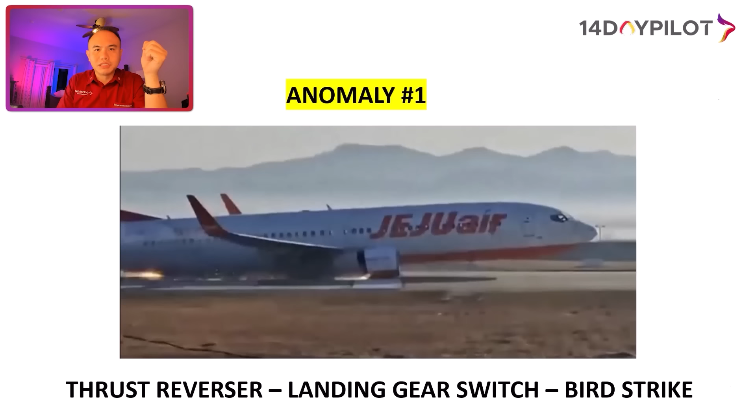The thrust reverser, landing gear switch, and bird strike. Based on this footage, I did a screenshot, and if you can see here, it's very clear that engine number 2 got a bird strike. I got another screenshot about it, you can watch the video.

Now, there's one thing you have to know. Every jet airplane has a thrust reversal system. Every time they land, they can open the cascade on the engine to reverse the airflow to help the airplane stop moving. It's like an air brake for every jet airplane. Now, if you can see here, it looks like the thrust reverser deployed without the landing gear.

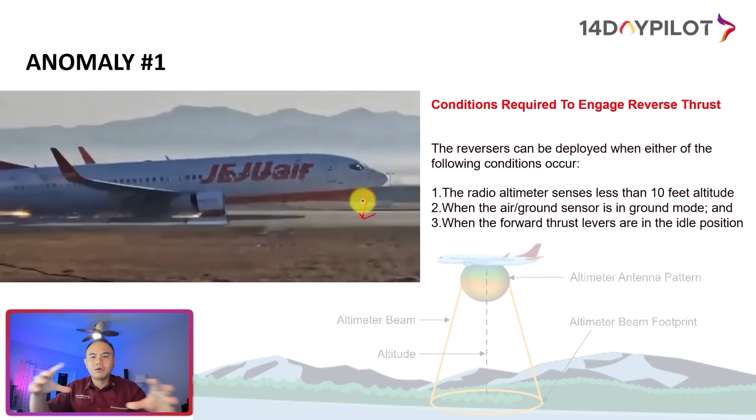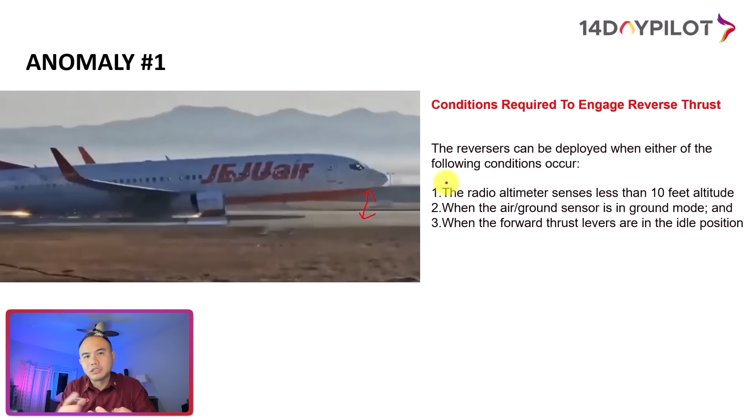Now, the conditions required to engage reverse thrust are 3 items. First, the radio altimeter senses that the altitude is less than 10 feet—based on radio altimeter sensors that send signals to the ground and back to the airplane, the airplane knows how high it is from the ground; we call that the radio altimeter. Second, the air/ground sensor is in ground mode, which requires the landing gear. Third, the forward thrust levers are in the idle position—if the thrust is moving forward, there's no way for the thrust levers to be open, they have to be back. So 3 items: the radio altimeter senses the airplane is about 10 feet above the ground, the air/ground sensor is in ground mode, and the thrust levers are back in idle position.

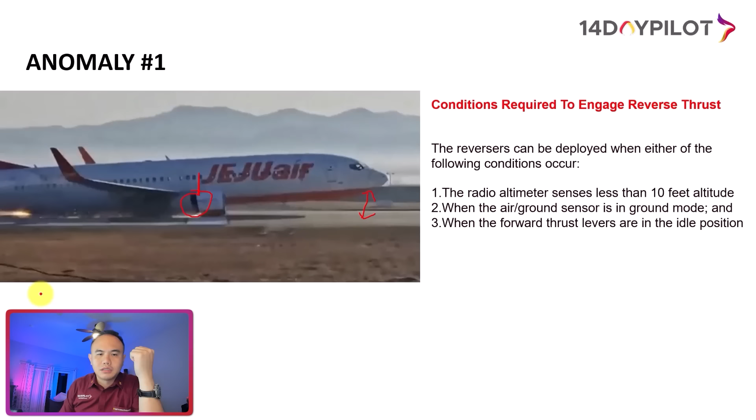So there's no landing gear, of course there's no sensor because the flight and ground mode is sensed by the landing gear switch. So we believe that what happened in the reverse thrust engine 2, why that was open, probably is not because of the thrust reverse systems, but because of the engine damage due to the bird strike.

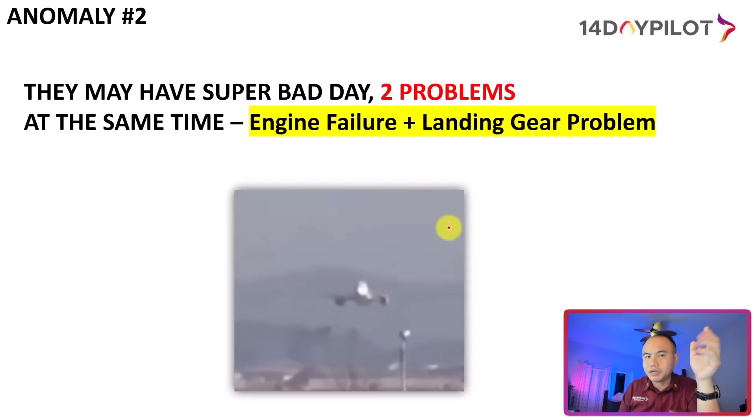So the pilot may or may not be aware that they're going to land without landing gear. The problem is if they were aware, they supposedly would have completed all the partial or landing gear up landing procedures. We're going to show you that after this. They may have had a super bad day, two problems at the same time: engine failure plus the landing gear problems. But however, the pilot never said anything about it, never declared mayday because of the landing gear, so I assume they were not even aware that the landing gear wasn't down at that time. I'm going to explore that more.

Now, let's say we got an engine failure number 2, which is the right engine, and this is your hydraulic systems. In the 737, you got system A, hydraulic B, and the standby system. The landing gear is controlled by hydraulic A, which is from the left engine, and this is hydraulic B from the right engine.

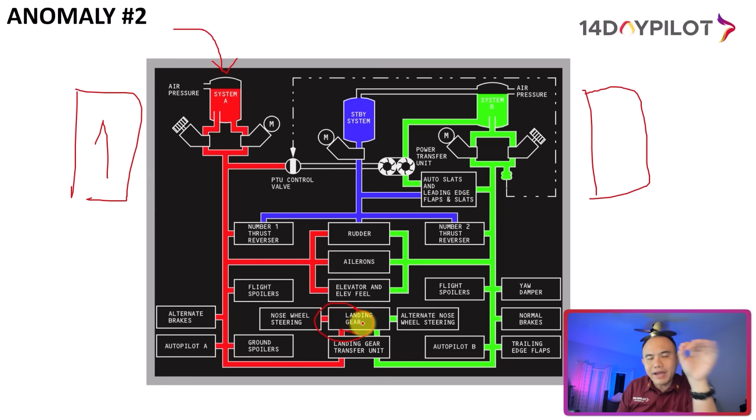And if you see here, you've got a landing gear here from the red system, which is A, or the left engine, engine number 1, as they call it. It's not affected by the bird because that was the second engine, or the right engine, which affects hydraulic system B, which got the trouble.

Now is there any backup? Yes, I'm going to show you this better graphic here. So if you see here, EDP is engine driven pump, and EMDP is the electric motor driven pump. Now if you see number 2 and number 1 here, it means the EDP, which is on system A, the hydraulic A, is supported by engine number 1, on the left side. Now the electric pump here is supported by engine number 2.

So this is part of the redundancy system, like a cross backup. Let's say you lose engine number 2, you're going to lose the engine driven pump because there's no pump anymore, the engine is shut down, right? But you have the EMDP from engine number 1 supporting you to give you the power to pressurize your hydraulics from engine number 1 to engine number 2.

Now the problem is the landing gear is not even connected to hydraulic B. So there's no reason for the landing gear not working because of the hydraulic problems. You got a point, right?

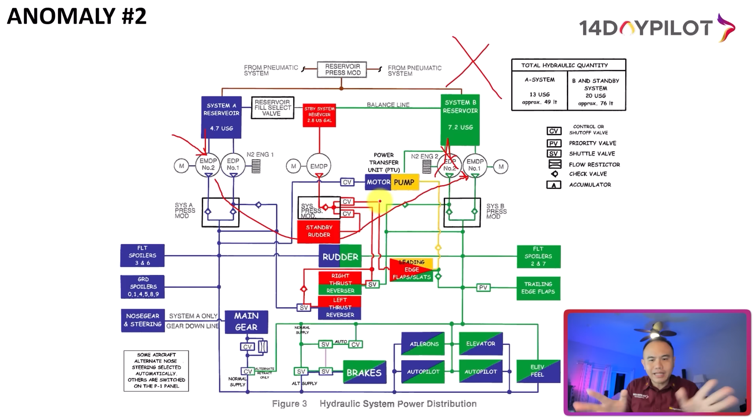Now assuming we also got problems with the hydraulics, the 737 can still extend the landing gear with a manual gear extension, which I'm going to show you after this. And if you see here, there's a landing gear transfer unit. It's a feature from Boeing to retract the landing gear when hydraulic system A failed.

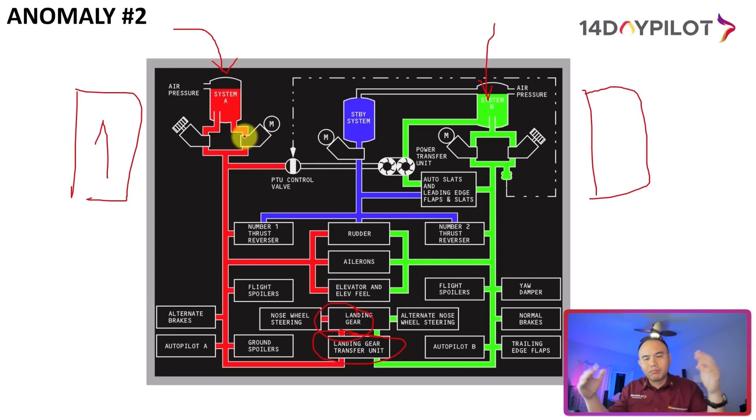That's the feature to protect the airplane to clear the second segment when the airplane takes off. You're going to learn more about this in the advanced flight training program during the ATP. That's the first segment, second segment for the safe altitude or safe performance whenever the airplane has an engine failure during takeoff. But this one is not for the takeoff, so we're not talking about the landing gear here - the landing gear transfer unit is all about retraction, not extension.

However, the pilot continued the approach. That's a problem now - there's no trial to do holding or execute gear up landing procedures. Now, how do I know that? The flight radar is showing a very clear path that the airplane keeps straight here. There's no go around, there's no holding.

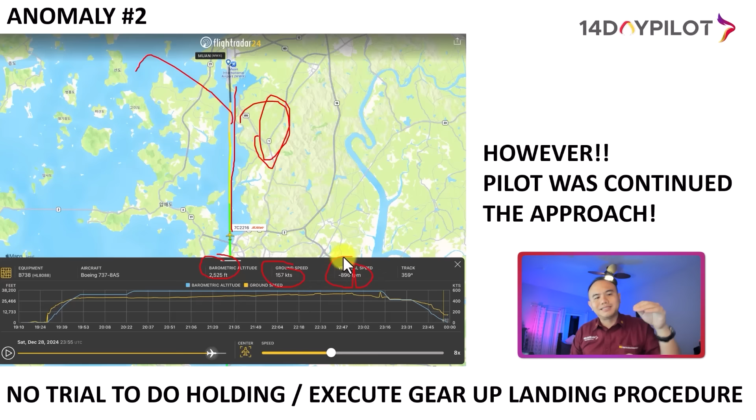Whatever it is, it's 2,500 feet altitude, the ground speed 157, the vertical speed is 896, which means the airplane is committed to doing the approach and land, and I don't see any effort or any deviation from the flight path.

Maybe the airplane decided, okay, let's fix the engine failure first, let's go here, or let's go here to do some holding, request from the approach, right? Or maybe burn the fuel because the airplane is going to have a belly landing.

That's common sense, and everybody learns about it in flying school. Well, I don't know what happened. That's why I call this an anomaly.

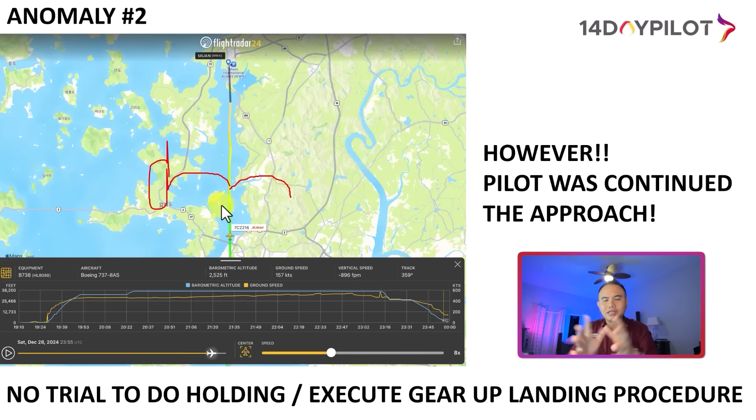I know the pilot's aware there's an engine failure, but I believe they don't do the complete engine failure procedures because there's a checklist that takes about 5 to 7 minutes to secure everything. But if the airplane is here with 800 or 900 feet per minute at 2,500 feet, let's do the math.

By 3 minutes, the airplane is already on the ground, okay? And there's no way for the pilot to complete the one engine inoperative checklist in this case if they don't move out from the path. So this is anomaly number 2. I don't know what happened inside.

That's why we need to wait until the flight data recorder and the CVR come in. But at least for now, we know for sure there's nothing to do with the bird strike. Even though there's a bird strike, guys, if we lose one engine, we still have another engine.

And every 6 months, airline pilots will have a proficiency check. They will get simulator training over and over and over again. They will simulate the one engine takeoff and landing.

For me, I'm flying the 737, I fly the A320, I fly the Citation. Basically, every proficiency check ride, we will demonstrate the takeoff with one engine inoperative and landing with one engine inoperative. So this is not normal.

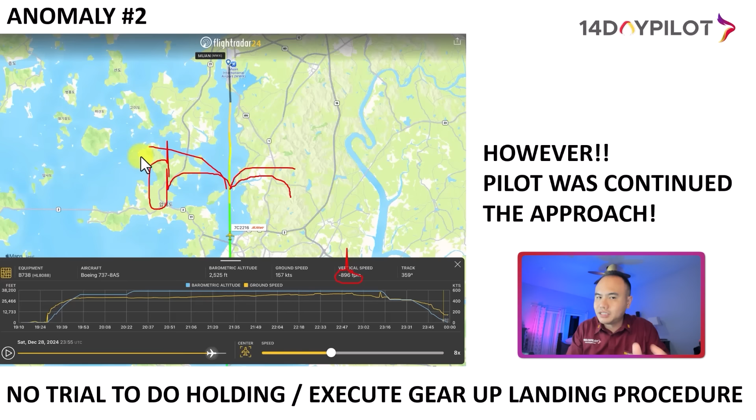I don't know what's going on inside, and let the NTSB or NTSC decide, but this is a very weird situation. This is an anomaly that I can raise and share with you.

Now, let's say they have the landing gear jammed in the up position. There's procedures, very long procedures, more than 10 minutes. There's no way for the pilots to keep straight all the way to runway 01 without doing this if they know that the landing gear is not extended.

Just common sense, you don't have to be a pilot to understand this. This is common sense for everybody. If you see there's steps here, okay, manual gear extension handle, all pull.

Let me show you the video of how we extend the landing gear manually.

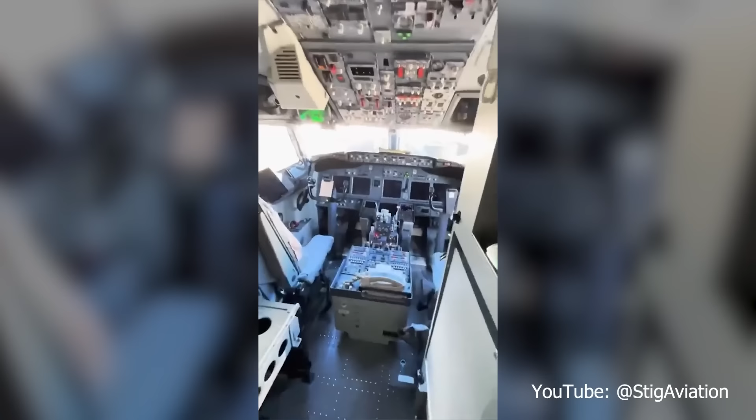Hey guys, and welcome to the Boeing 737-800. I want to show you something really special. This is a very important component. Down by the first officer, on the floor, there's a special little compartment. This is for the gear manual extension.

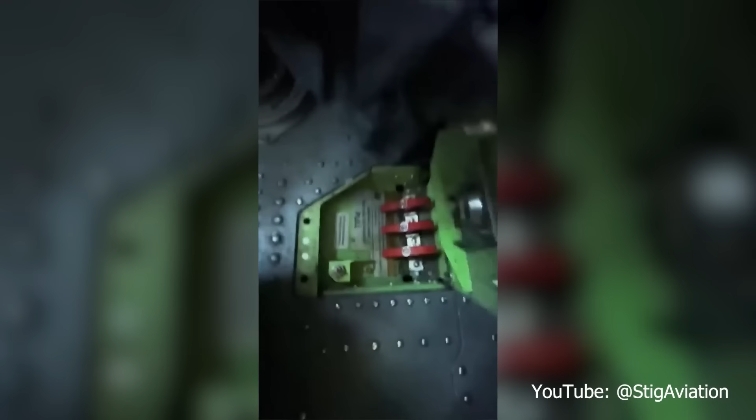Why is this important? Well, in normal operations, the aircraft runs on hydraulics. Pilots can retract or deploy the gear utilizing hydraulics. But in case of a failure in hydraulics, pilots are capable of gravity dropping the gears. Those handles you saw right there are attached to cables, and those cables are routed to the gears.

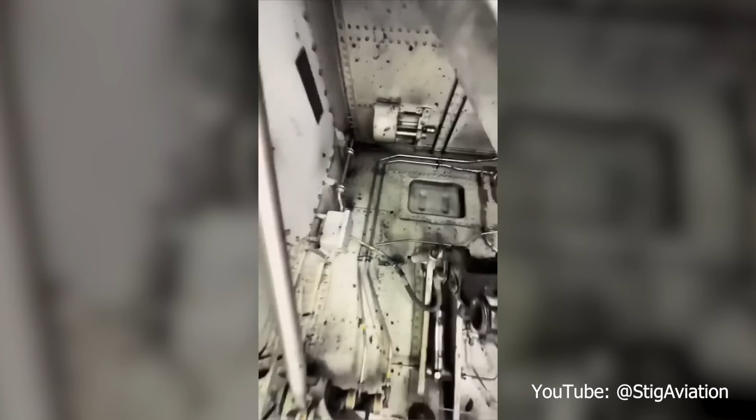This is the nose wheel well. Top left right there, that's a locking mechanism. Those cables are attached to that locking mechanism. This is what releases when those cables are pulled.

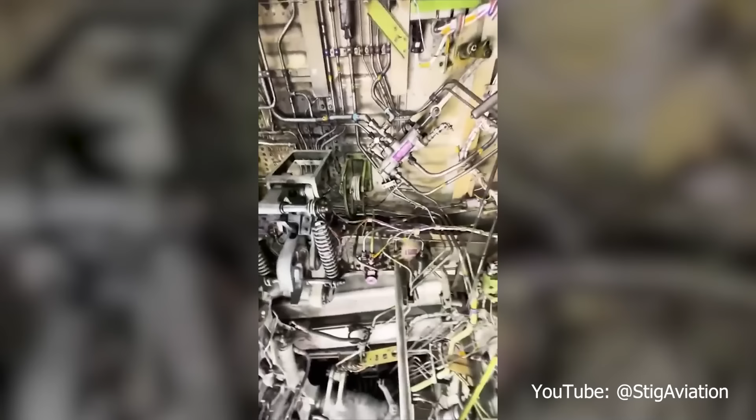Let's go take a look at the main gear. Same thing, the cables are routed down to the main gear. Pay close attention to what I zoom in on. When you pull that cable in the flight deck, the control cable turns the quadrant in the extension linkage.

This pulls the control rod and turns the lever. When the lever is turned, the uplock actuator gets released. Look closer, you'll actually see a spring there. The cable gets retracted as well. And right next to it is the uplock actuator, the one with the springs.

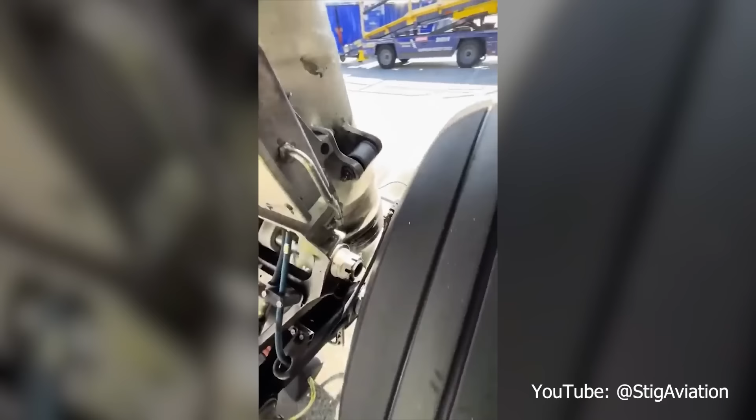Take a look at the strut, you'll see a little knuckle. That gets locked into that uplock actuator. That's it. Now you know.

We're going to pull the cable, and then gravity force will make the landing gear drop. No matter if you don't have the hydraulics, at least if you try to open it, if the landing gear is stuck, you will see visually from the footage that the door probably won't be 100% closed, because that's how the pilot does it. They pull it, the landing gear will go down.

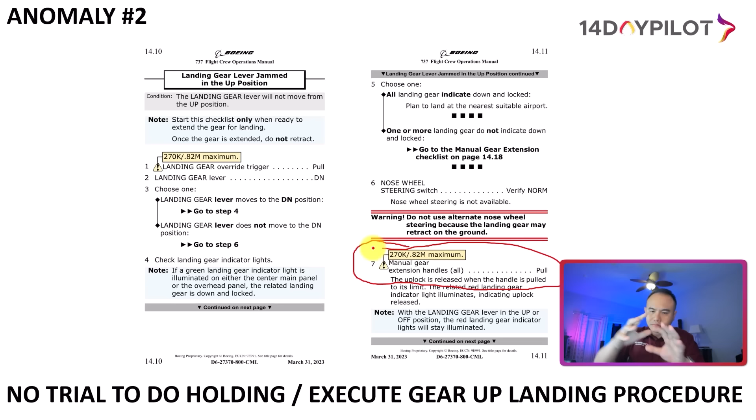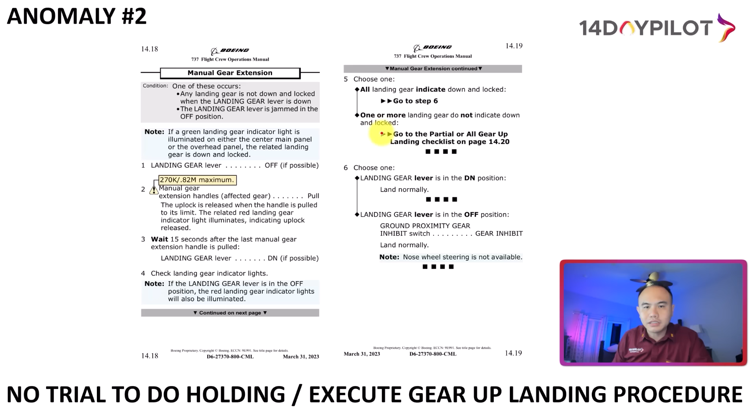But of course, you need to hold at different positions. You cannot just continue the approach while doing that, you need to go somewhere else and do all these procedures. Especially if you see the manual gear extension steps, 1, 2, 3, 4, wait 15 seconds after the last manual landing gear step, and so on, then go to step 6 and so on. There's a procedure to do manual landing gear extension.

There's trials here, take some time. If the landing gear is still stuck, there's another procedure called partial or all gear up landing.

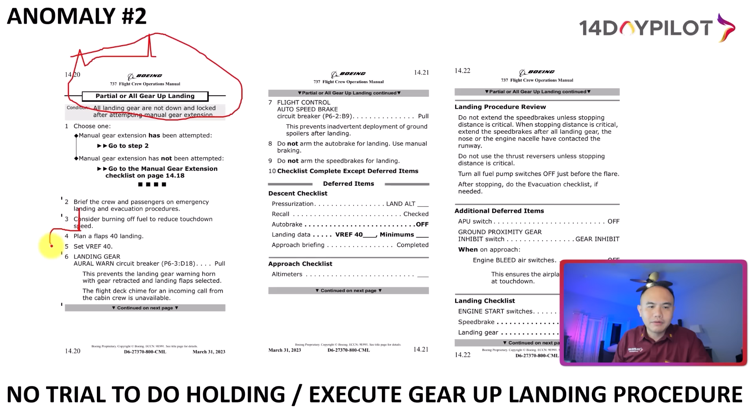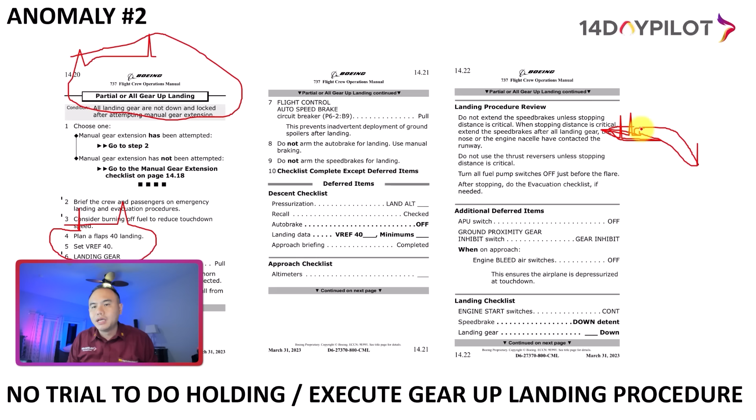You need to have a plan for flap 40. If you take any flight and sit on the window side, every time it's landing, normally the Boeing 737 will use flaps 30. You'll see the flaps go down, and it's very clear the forward flaps go down and it's not flat. But you can always see the airplane never puts the flaps more than 30 because it's flat.

The flap is maybe at 15 because they got an engine failure. Whenever you have one engine operative, you will most likely land with flap 15. If they were aware the landing gear cannot be extended manually, they need to do a partial or gear up landing. There are two things: first, the flap should be at 40. Second, they should declare and ask for ground emergency equipment to make sure everybody is ready for the belly landing. From what I heard, I cannot find any pilot distress call about a landing gear failure. So that's anomaly number 2.

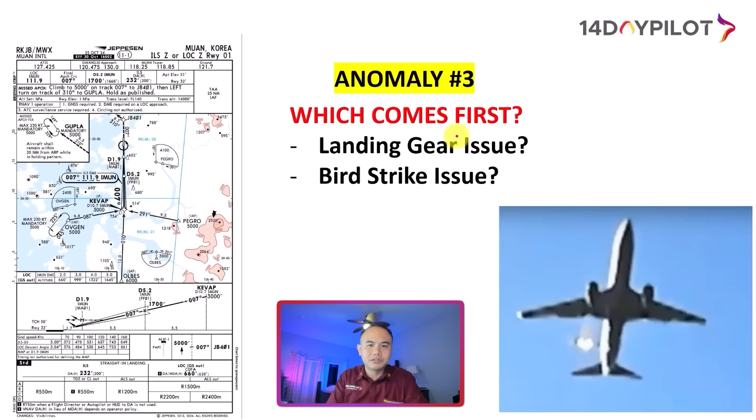Now, anomaly number 3: which came first, the landing gear issue or the bird strike issue? This is the first bird strike footage that I can get, and this is possibly the ILS Zulu runway 01 approach that they flew.

Every pilot flying instruments in the airline shoots the approach this way. The first altitude kept up is 3,000. The final approach fix on the ILS will be 1,700 feet when we intercept the glide slope. It depends on the operator, but Boeing says in the FCTM that you lower the landing gear when the glide slope comes alive.

That's the moment. Now let's assume they intercept the glide slope here and decide to lower the landing gear between 3,000 and 1,700, probably around 2,000 or 2,500. When they see the glide slope already moving, they put the landing gear down. That's the moment they should realize they don't have the landing gear. Does that make sense? But I'm not sure how high this footage was taken, because it looks like it's zoomed from a mobile phone.

Let's assume they got a landing gear issue at 2,500. I'm not sure whether a bird can fly more than 2,500 or maybe 3,000. Some birds can, but in this case probably not that high. I don't think at 2,500 you'd get a potential bird strike. Most likely a bird strike happens after takeoff, probably less than 1,000 feet. So in this case, if they extended the landing gear around 2,500 to 3,000, they would get the landing gear issue first, before the bird strike.

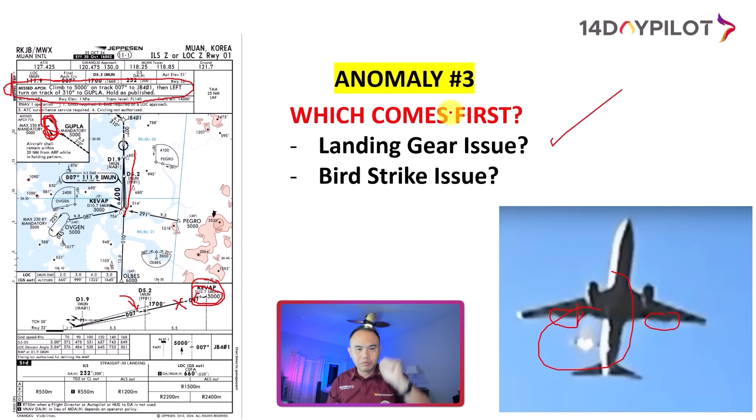But what happened here? If they get a bird strike issue and then they put the landing gear down, the landing gear stops. Anyhow they should go around, right? Because they need to pull up the QRH and get the non-normal checklist for engine failure. You see? So that's a problem now, right?

So the weird situation is I don't see the airplane flap set more than 15 degrees. It means it's definitely an engine failure, because nobody would set more than 15 even though they've got a 30 degrees flaps option. We're gonna retract back to 15 to reduce the drag.

Ground speed only 144 knots. Why on earth would they have 144 knots on the ground speed and not have flaps more than 15? Okay, based on the visual again.

And then at 800 feet, possible manual flying, and the vertical speed beyond 1000 feet for a stable approach. If you can see here, at 800 feet their vertical speed is 1152. It means they already disconnected the autopilot, disengaged it, and then flew manually, and the vertical speed is more than 1000, which is the limitation for a stable approach.

100 or 200 more than this, they're probably gonna get a sink rate call. It's like maybe 1400, right? They will get a sink rate warning. It means they're not stable flying with the hand.

But if you try to play around with the flight radar, you will see that they made a correction after that. But the speed is still low. I don't understand why the speed is 144, the ground speed.

Okay, I got the weather data, the METARs on that day. So the anomaly number 4 now is we're talking about the unstable approach and GPWS, the GPWS. The hand flying is not following the correct lateral path.

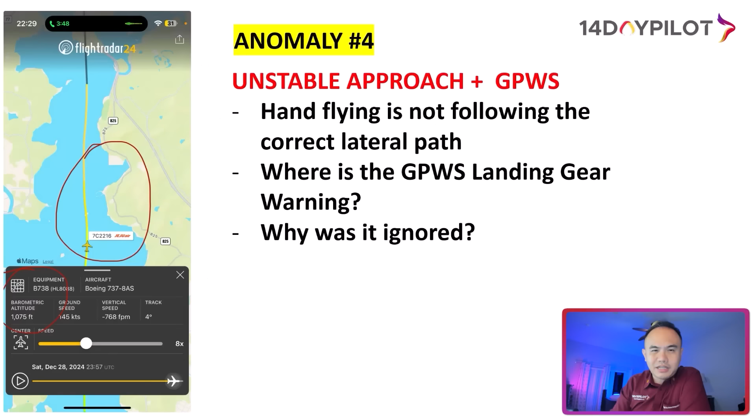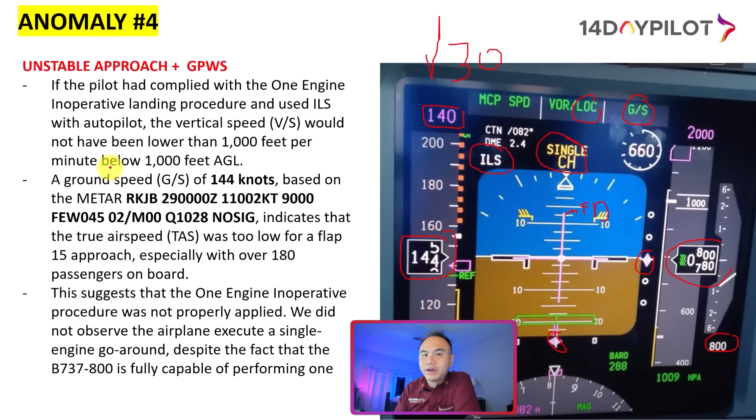In that case, more than 1000 feet per minute descent is not normal for the situation. This suggests that the one-engine-inoperative procedure was not properly applied. We did not observe the airplane execute a single-engine go-around, despite the fact that the 737-800 is fully capable of performing one.

Anomaly number 5: why didn't the pilot try to fix the issue before deciding to land with a possible engine failure and no landing gear? This is the biggest question that I, and maybe you, and maybe everybody will ask.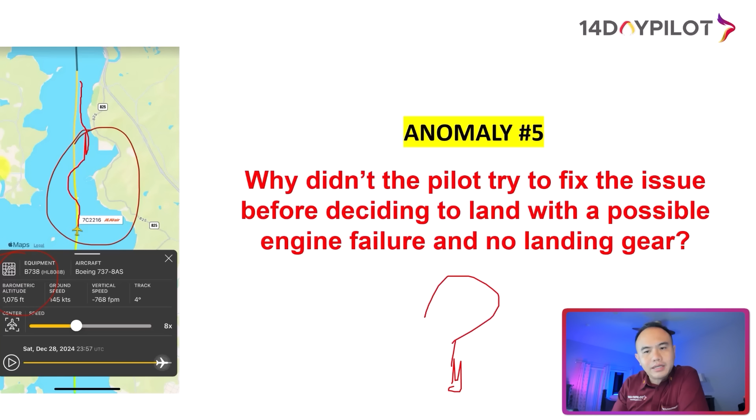The airplane is flying like an S-turn here, non-stable with the vertical speed, below 1,000 feet, in a condition where they know for sure, they called a mayday for the engine failure, with the landing gear not down, but they didn't do anything to fix the issue. They don't go around to fix the approach. They don't try to declare that the landing gear is not down. So I don't know what really happened here.

Now the possible contributing factors, based on the NTSB category. Human factor: CRM crisis, seniority problems. This could be a contributing factor in this accident. Refer to the Asiana Flight 214 at San Francisco — that's also CRM and seniority problems on the South Korea side.

Fixation that caused lack of situation awareness — both pilots focused on the single engine problem and forgot about the landing gear. This could be like that.

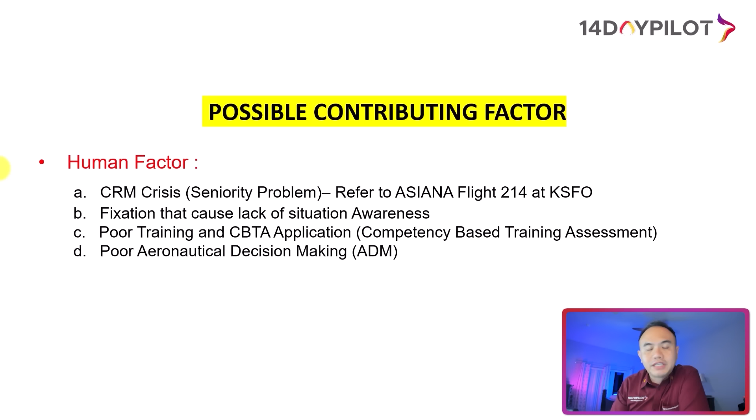Poor training and CBTA application — CBTA is competency-based training assessment. And poor aeronautical decision making, the ADM. It's very clear the pilots should be aware that they need to fix the problem; their job is to run the checklist before continuing the approach.

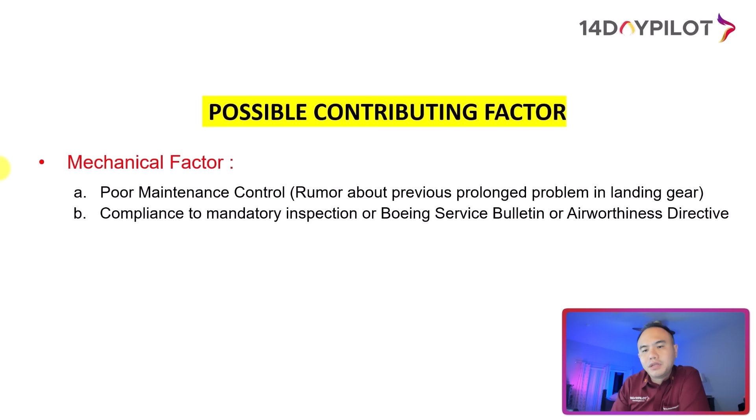Mechanical factor: poor maintenance control. There's a rumor about a previous prolonged problem with the landing gear, but I don't know if that's a rumor or a fact, so let the regulator find it. Compliance to mandatory inspections, Boeing Service Bulletins, or Airworthiness Directives related to the landing gear has probably become a contributing factor as well.

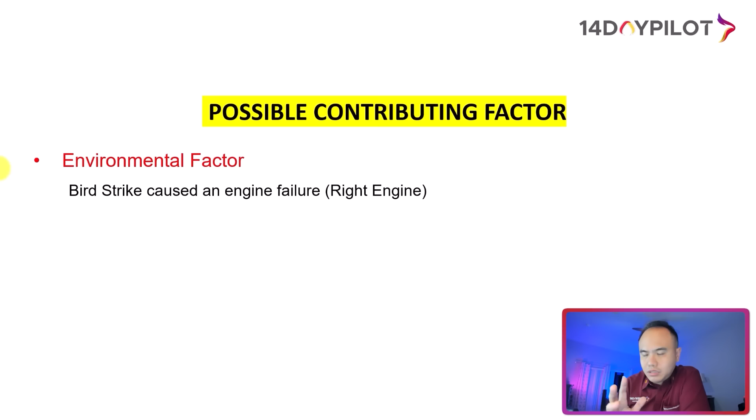How about the environmental factor? Of course, the bird strike caused an engine failure, which created a threat. But again, this is not the biggest threat — everybody is trained in single-engine takeoff or single-engine landing, handling failures like this when you become a jet pilot.

And the last one is organizational factor: possible poor company governance and safety management, creating a bad safety culture in the flight operations department. So what could have been done better, guys? Aviate, navigate, communicate — it's always aviate, navigate, communicate.

The Boeing 737-800 is a highly capable and reliable aircraft, able to handle engine failures and landing gear issues. Number 2: the pilot should have considered executing a go-around to address the problem step by step, rather than continuing the approach and landing, unless the aircraft was in a minimum fuel emergency. However, no emergency call was reported from the pilot about fuel, right?

Number 3: the pilot never declared the landing gear malfunction, even though they were fixated on the engine issue. The GPWS warning for low gear and the continuous horn, which cannot be silenced, should have alerted them. The pilot monitoring — the pilot not flying, whether co-pilot or captain depending who's flying that leg — plays a critical role in ensuring the aircraft returns safely. Their job is to monitor what happens.

Let's say we got an engine failure and the pilot flying is busy flying the airplane, but you've got a second pilot to watch you, to run all the checklists. So what happened with the co-pilot? It could be that he was too scared to remind the captain.

This happened with Garuda Indonesia in 2007 when it overran the runway because it landed too fast, with approach speeds more than normal, and the co-pilot didn't do anything to override the controls because the captain was really senior and said, 'I'm the senior pilot here, I know what I'm doing.' So that's the accident that happened, right?

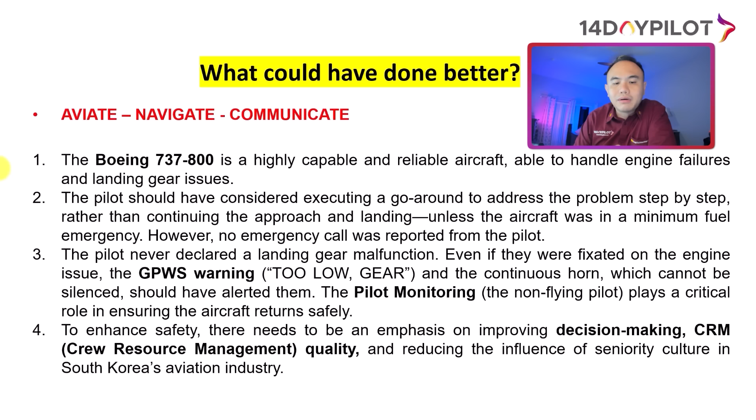And number 4: to enhance safety, there needs to be an emphasis on improving decision making, CRM quality, and reducing the influence of seniority culture in the South Korea aviation industry.

Well guys, we already know what we know today. We're going to wait until the final conclusion from the NTSB or NTSC. Deepest condolences one more time, and I hope you're going to learn from this video to become more aware as a pilot in command.

Aviate, navigate, and communicate. You can always go around and fix the problem up there. Do not force yourself to land the airplane in the worst condition without any preparation beforehand. Safe flight for you — until next time, and God bless you.